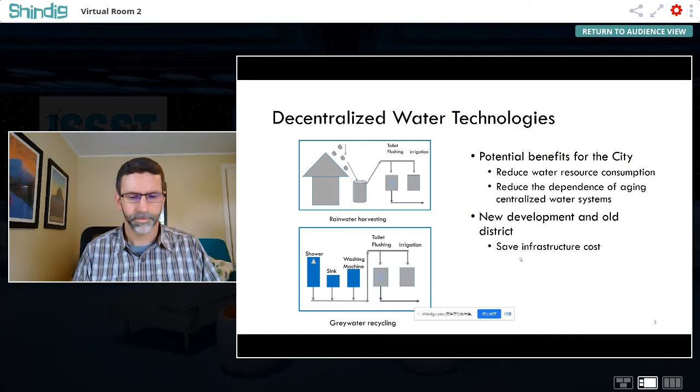It can also save a huge amount of money considering the system upgrades and extensions. But before the utility company can make the investment and the government can better plan for the deployment of such systems, we need to first investigate the people's preferences, in other words, the market potential for such systems.

So here in our research, we built up a bottom-up agent-based model to simulate the spatial adoption and diffusion pattern of decentralized technologies resulting from households' adoption choices. In each round of the simulation, we choose a certain number of households to formulate the samples, and we calculate the agent's adoption utility based on the agent's choice, the agent's preference, and the economic attractiveness and the involvement factors of the environmental benefits.

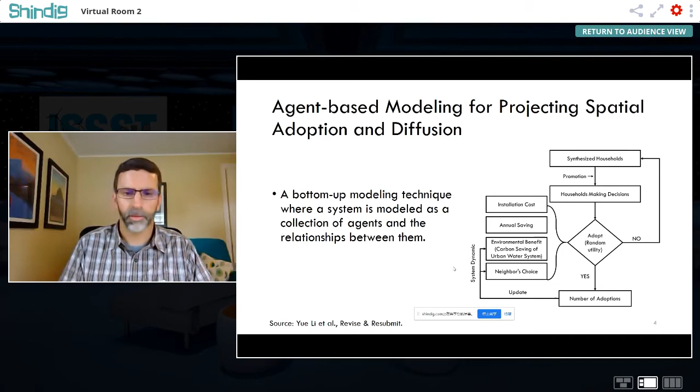Here the neighborhood choices have influences, and we will also calculate the household's decision - in other words, the household's choice decision will depend on the agent's decision with the highest utility value. For those households who didn't adopt any technology, they will return to the agent's pool, and they will still have the chance to join the next rounds of selection and simulation.

In the agent-based model, we first created the synthetic households based on the personal and socio-economic characteristics of the household members. We also collected the property information such as the building height, building size, and the rooftop areas, and randomly allocate the household agents into the corresponding properties to complete the setup of the agents.

And then we use the choice model to calculate the utility of each choice. We use the latent class, like the Latent GOLD choice software, to calibrate our choice model and calculate the conditional probability of class X choosing option M. The software can generate the optimal number of classes and help us to better interpret our results.

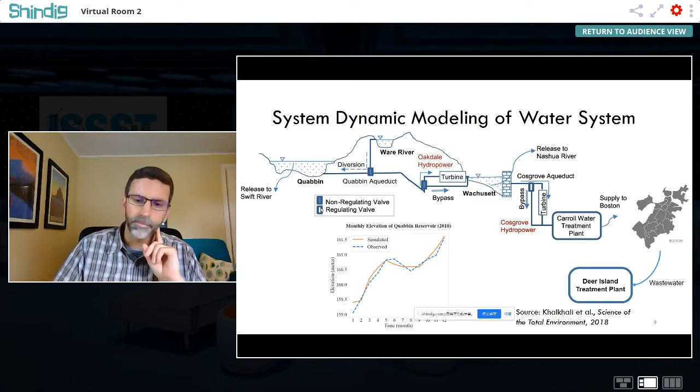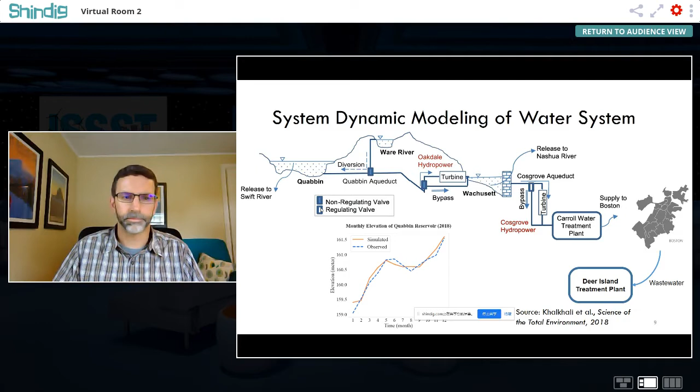We also validated our results by comparing the simulated monthly reservoir elevations with the historical records in the reference year without any adoption of decentralized technologies. Based on both validation results, we can see our simulation results are basically in line with the reported data, and thus can prove the effectiveness of using our model to predict the spatial adoption and diffusion pattern of decentralized water technologies, as well as the impacts of large-scale implementation of decentralized technology on the whole urban water system.

We also visualize the spatial and temporal adoption pattern of rainwater harvesting technology and greywater recycling systems, and we traced their diffusion trajectories. We can see the diffusion converges after 43 rounds of the simulation, and most single-family households prefer to install rainwater harvesting systems. The diffusion of the rainwater harvesting systems will start earlier from the north and central places and will spread later southwards.

To the southward communities, while the GWR, the greywater recycling systems, will diffuse from and mainly concentrate in the north central places and the southwest areas. By visualizing these trajectories, our results can be supportive to recognize the communities with high market potential, and such we can help the government to identify the high potential neighborhoods and accelerate the adoption of sustainable water technologies in a city.

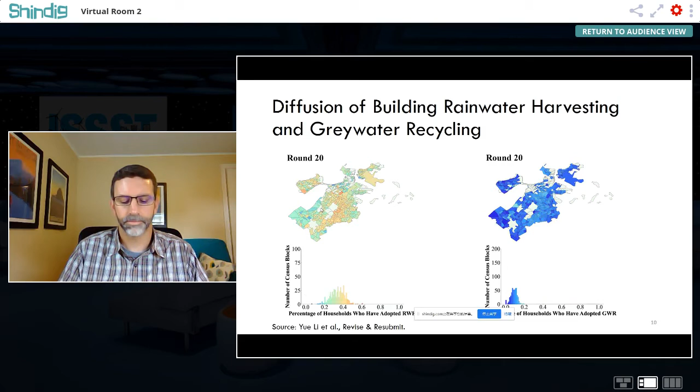Our system dynamic results show that the Quabbin Reservoir has more water during summer and autumn, as a huge amount of fresh water can be saved from landscape irrigation by using rainwater or greywater instead. However, the hydropower generation decreases as less water will be transferred through the hydraulic turbines when potable water supply reduces. Reservoirs will discharge more water to downstream rivers to prevent their water levels from rising beyond the warning levels. It is for safety purposes, but it can also indicate a potential added hydropower potential.

Overall, our system dynamic models suggest the significant trade-offs associated with the large-scale implementation of decentralized technologies, and also quantify the trade-offs between the water saving and the hydropower energy reduction. And furthermore, we didn't find significant carbon reduction because of the high electricity consumption of greywater recycling systems.

So in the future, we are going to explore the optimal deployment strategy for water decentralization to minimize the installation cost and energy used at the same time. By comparing the adoption pattern based on household choices to this optimal deployment solution, we wish to provide insights to the city planners and the government for better designing and planning the innovation in a city.

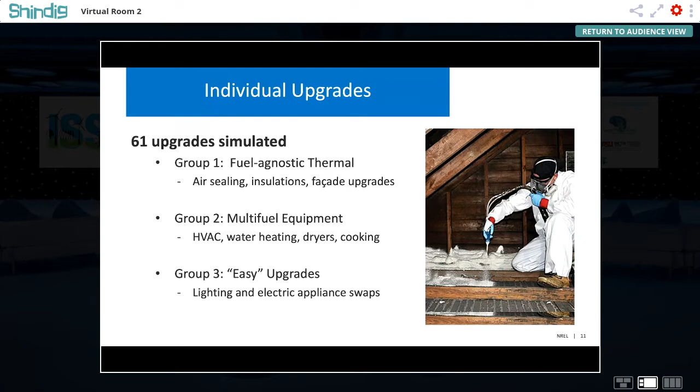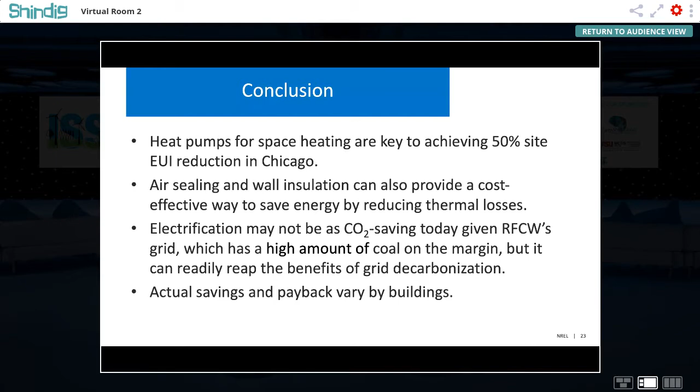Finally, I want to caveat by saying that the actual savings and paybacks vary quite a bit by buildings, even though we did not really show the variability here in this presentation. And there are many interesting questions that remain for further investigation in the near future, including in what situations or building segments will retrofit packages not lead to savings, and what are the thermal resilience and indoor air quality benefits of the retrofit packages.

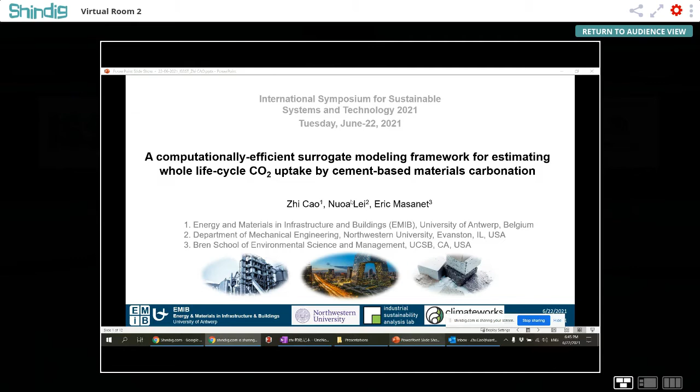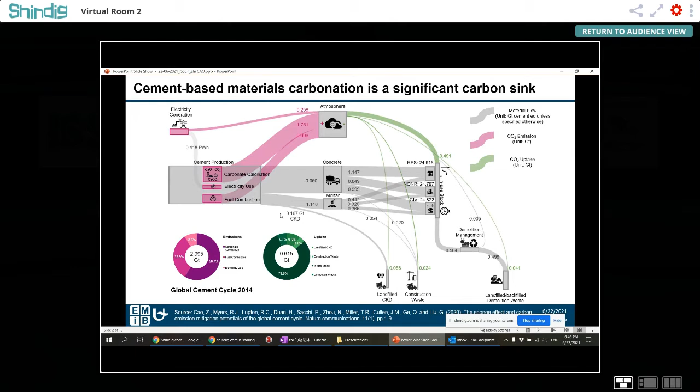So why does cement-based materials carbonation matter? Cement-based materials carbonation is well known as a deterioration mechanism of cement-based materials. But its contribution as an anthropogenic CO2 sink is not equally recognized as compared to its contribution to CO2 emissions. A few studies, including our own study, have pointed out that reabsorption of CO2 by cement-based materials is a significant CO2 sink, offsetting around 20% of CO2 emissions arising from cement production, or 40% of process CO2 emissions if we exclude fuels and electricity used by cement production. Future reabsorption of CO2 will become more significant, driven by growing population and material needs.

To estimate the CO2 reabsorption by cement-based materials, we have to understand the mechanism of carbonation first. As we all know, the main ingredients of ordinary Portland cement include alite, belite, and calcium aluminate, which have significant hydraulicity. After mixing cement with water and aggregates, atmospheric CO2 dissolves in the pore water of concrete and forms carbonic acid. The carbonic acid reacts with hydrated calcium silicates and calcium aluminate. This reaction leads to the formation of calcium carbonate, a process called carbonation.

This process starts at the concrete surface, then slowly penetrates deeper over time. Although it requires a great length of time, cement-based materials carbonation will eventually soak up a substantial amount of CO2. While it could occur in various life cycle stages of cement-based materials, carbonation is most complex in the in-use stage and in the end-of-life stage.

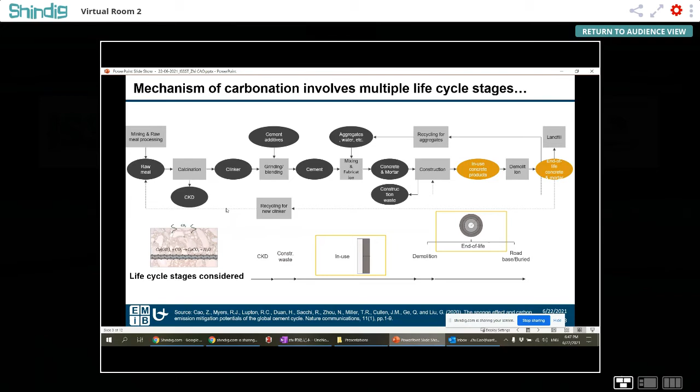At a higher system level, the quantities of cement-based materials that stay in the in-use stage and in the end-of-life stage are determined by their service life, which can be characterized by a survival function and a density function. To illustrate the mechanism, we regard the quantity of concrete consumed in the first year as time cohort 1. The portion of time cohort 1 that stays in use will diminish over time, while the portion that enters the end-of-life stage will climb up over time.

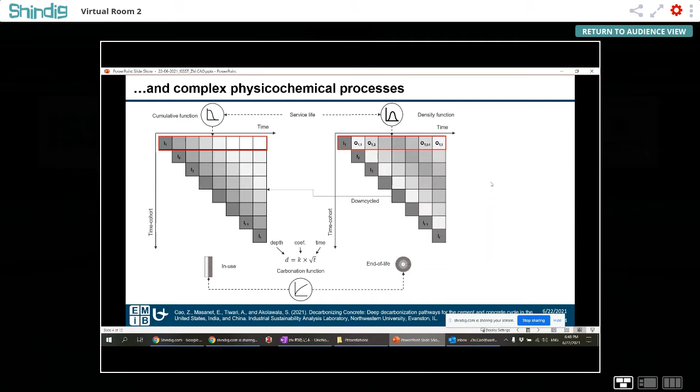We use a carbonation function to describe the carbonation process in the in-use stage and in the end-of-life stage, except that the former is characterized as a slab, and the latter as a sphere. The carbonation process is described as a function of the square root of time, and the coefficient K is subject to a wide range of parameters, including concrete additives, coating and cover, CO2 concentration, exposure conditions, calcium oxide content, share of calcium oxide fully carbonated, particle size of end-of-life cement-based materials, recycling rate, etc.

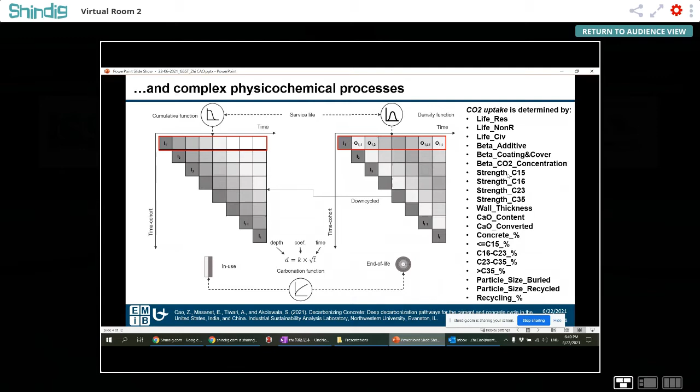Initially, we used a physics-based model to parameterize these complex processes. With this physics-based model, simulating cement-based materials carbonation is actually computationally expensive. Taking the United States cement and concrete cycle as an example, with a physics-based model, it takes 80 seconds to run a single simulation. If we were to run the simulations 1,000 times, which is a reasonable but already small number for uncertainty quantification, we would have to wait for almost 24 hours, which is essentially an entire day.

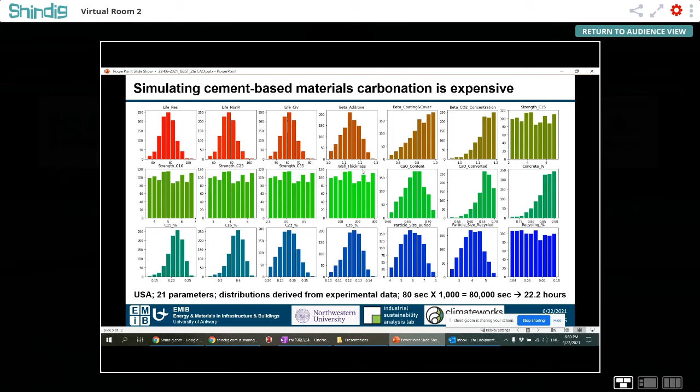We could, of course, disregard the slowness and invest our computational budget directly in the simulations. However, this slowness is unlikely to be satisfying for later optimizations when costs and emerging technologies that have impact on CO2 uptake are considered. You may want to start your simulations with different starting points and different constraints. Also, when it comes to optimizations, even if you have obtained satisfactory results, you may still want to further investigate to see if a better trade-off can be struck between competing objectives.

So the basic idea of surrogate modeling is to avoid investing your computational budget in answering the questions at hand. Instead, the surrogate model helps develop fast approximations to complex physics-based models. Having these approximations will allow us to implement fast uncertainty and sensitivity analysis, explore trade-offs in optimizations, and therefore gain more insights.

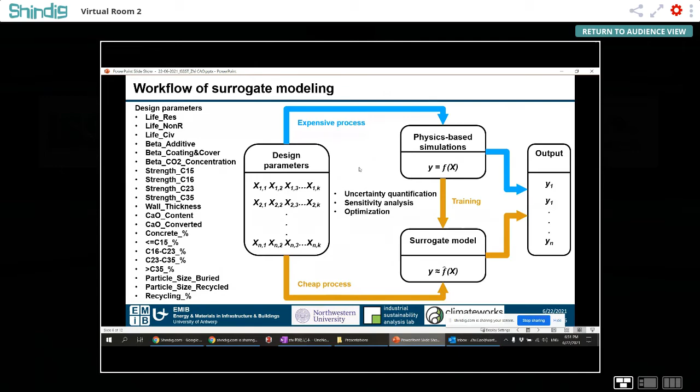While the basic idea of surrogate modeling sounds simple, the devil is in the details. The most urgent question for us now is what surrogate model is most suitable for approximating the physics-based models. We started with Gaussian process, which is the most widely used surrogate model because of its interpretability. However, a Gaussian process model loses efficiency when the number of features exceeds a few dozen, and using Gaussian process makes hyperparameter tuning super challenging, which is an essential step for training the chosen surrogate model.

So we turn to decision tree regression, which is more efficient and also intuitive for decision makers compared to other regression models. We also employed gradient boosting to improve the predictive accuracy of our surrogate model, and the computational efficiency of gradient boosting decision tree regression also allows us to implement hyperparameter tuning more easily.

The traditional ways of performing hyperparameter tuning or hyperparameter optimization have been grid search or random search. Grid search is simply doing an exhaustive search through a specific subset of the hyperparameter space, and random search replaces the exhaustive enumeration by selecting hyperparameters randomly. Here, instead of using these expensive hyperparameter tuning strategies, we employed a Bayesian optimization strategy, which can iteratively evaluate a promising hyperparameter configuration based on the current model and update the model continuously.

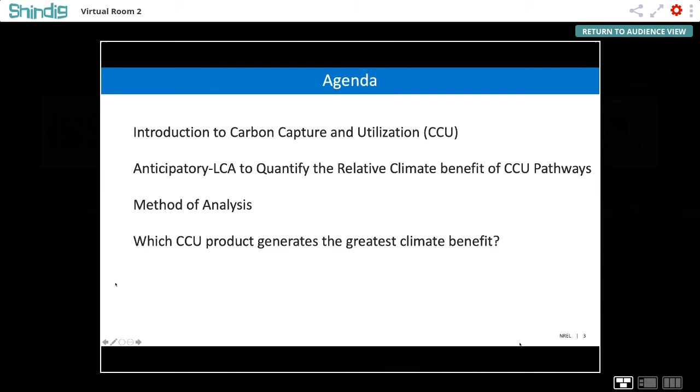So with that, a brief agenda introduction: What exactly is carbon capture and utilization? How can we apply this method of LCA called anticipatory LCA to quantify the relative climate benefits of CCU pathways, methods of analysis, and which CCU product generates the greatest climate benefit? By CCU, I mean carbon capture and utilization.

So a brief introduction to carbon capture and utilization. What exactly is carbon capture and utilization? In its simplest form, it can be referred to as a specific circular economy strategy for CO2 waste emissions. What happens in CCU is that we have emissions from multiple industrial processes occurring globally. You capture the CO2 and make use of it as a feedstock to produce valuable products: concrete, chemicals, aggregates. So basically you're closing the loop, preventing atmospheric CO2 emissions, and also you have an economic incentive because these products you're generating are commercially valuable.

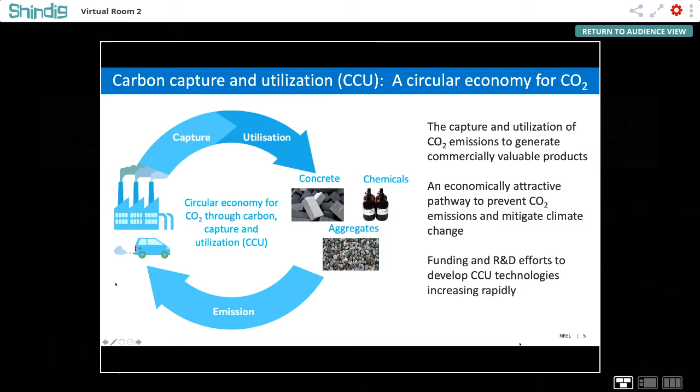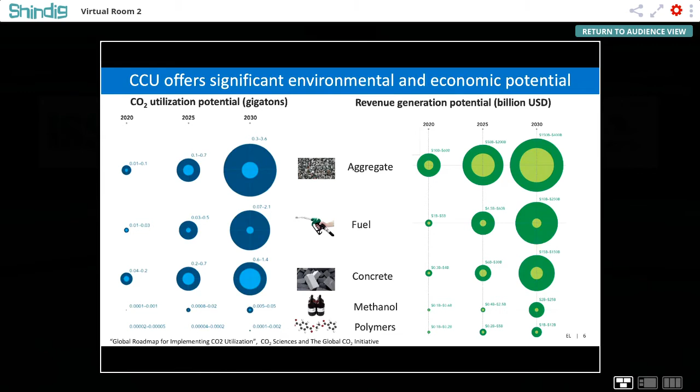Because of the technology development, you can make use of CO2 to produce concrete, chemicals, or minerals. However, there are some key limitations in the existing LCAs of CCU technologies.

Beyond quantifying the climate benefit based on CO2 utilization, there is a lack of a robust method to compare the different pathways. So where exactly can we use CO2 to produce maximum benefits? Is it concrete, chemicals, or minerals?

Obviously, we have the issue of data uncertainty because a lot of these technologies are in the early stages of R&D. So we know that there's going to be an issue with data uncertainty.

How do we guide technology developers in identifying promising research and development strategies to maximize the climate benefits from CCU technologies? How do we account for system aspects? Because we're going to use renewable electricity, is there a better way of utilizing the renewable electricity?

Can we supply the renewable electricity directly to the grid to offset CO2 emissions on the grid, especially when the grid is dirty, instead of making use of renewable electricity in CCU applications? So that's another system aspect that needs to be rigorously and robustly evaluated.

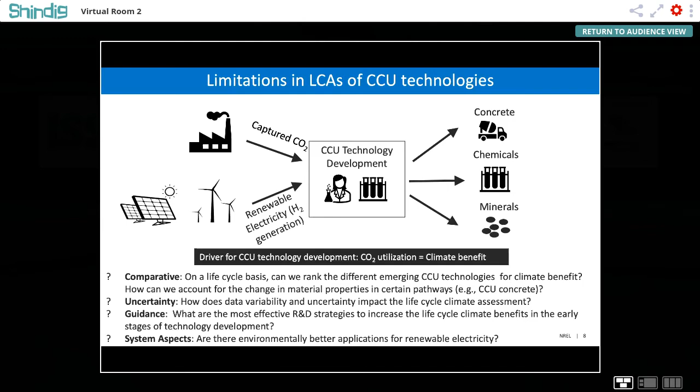Also, there's another challenge from a purely life cycle perspective. When we make use of carbon dioxide to produce products, sometimes the material properties of products changes. For example, when you make use of CO2 to cure concrete, while the mass of concrete is identical, the compressive strength, the durability of concrete can change. So from a functional unit point of view in an LCA, that introduces challenges.

So in order to address these challenges, I've applied this anticipatory LCA method of evaluating CCU technologies. I'm going to start from the left.

I'm going to account for the potential better uses of renewable electricity, for example supplying into the grid. I call this the environmental opportunity cost.

I'm going to evaluate emerging technologies and incorporate uncertainty assessment. At the same time, also identify ways in which we can guide technology developers in the early stages of technology development. The entire analysis is going to be done on a comparative basis, not an absolute basis.

So I'm going to evaluate the climate benefits from utilizing 1 kg of CO2 across different pathways. And I'm going to account for other aspects like what I just mentioned, including changes in material properties because of CO2 utilization when comparing the different technologies to utilize CO2. So this is my approach at a high level.

So I'm going to get down into the details a little bit, but just a little bit. I'm going to compare CCU pathways. The basic assumption here is that when I'm going to produce a CCU product, for example CCU methanol, I'm going to offset the conventional pathway of producing methanol.

So that's the basic underlying assumption. This is the system boundary for the CCU technology. I'm going to capture CO2 from a natural gas power plant, and I'm going to utilize it across producing concrete, chemicals, and minerals.

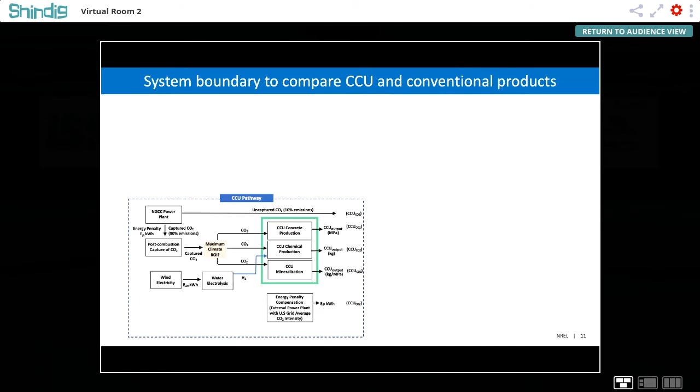So I'm going to compare this with the conventional pathway, because if you're going to produce a product through a commercial product and through the CCU pathway, we're going to offset a conventional production. In the conventional production, because there's no carbon capture, the emissions from the power plant is going to occur directly into the atmosphere. The wind electricity is going to be supplied to the grid instead of being used in CCU.

That's the opportunity cost. And we have the conventional way of producing the material or the chemical or the product. So that's what is going to be offset if you're going to use the CCU pathway. The conventional pathway is going to be offset.

So in terms of the details, I've collected inventory data from 99 data sets through an exhaustive literature review, 69 data sets for chemicals and 26 data sets for minerals. And I've used SimaPro and EcoInvent to determine the life cycle CO2 impacts, both in the CCU pathway and in the conventional pathway.

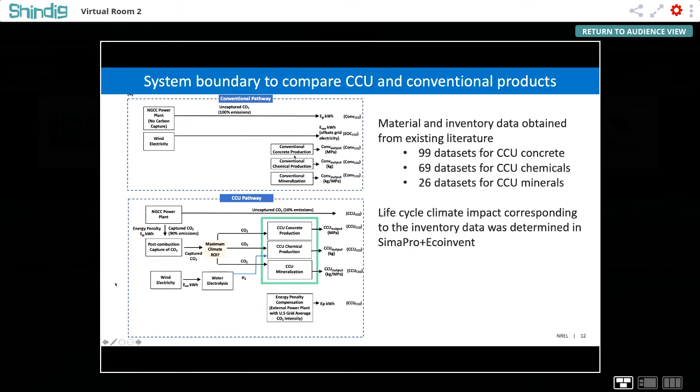So in terms of the products or the pathways, I'm going to evaluate 20 different products: 4 concrete, 13 chemicals, and 3 mineral pathways. So I'm going to evaluate the relative climate benefit across these 20 products.

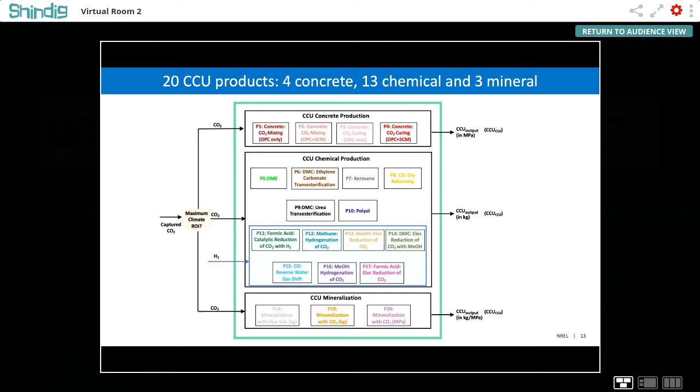So I was referring to the climate ROI metric. So what exactly is the climate ROI metric? The climate ROI metric, without getting into the details too much, is a simple unitless metric. It's a ratio. The numerator of the ratio determines the amount of CO2 that's avoided per functional unit of the product. The functional unit can be compressive strength for concrete, the mass for chemicals, or the mass for minerals. So I'm looking at different functional units. So this is one key advantage: it helps harmonize across different functional units when I'm comparing the 20 CCU pathways.

And in the denominator, I'm going to look at the CO2 utilized per functional unit of the CCU product. So basically, this gives me the amount of CO2 that is avoided from a broad life cycle perspective per unit kg of CO2 that is utilized in producing a specific product. So the implication of this is that the greater the value of climate ROI, the greater is the climate benefit that is generated, especially if it's greater than 0.

If the climate ROI is less than 0, that means despite utilizing CO2, from a life cycle perspective you're increasing climate burdens. So this is the key aspect that you need to consider. If it's greater than 0, it's good for the climate. If the climate ROI is less than 0, it is bad for the climate. So this is what I'm going to refer to in the future slides, so I'll not get into the details.

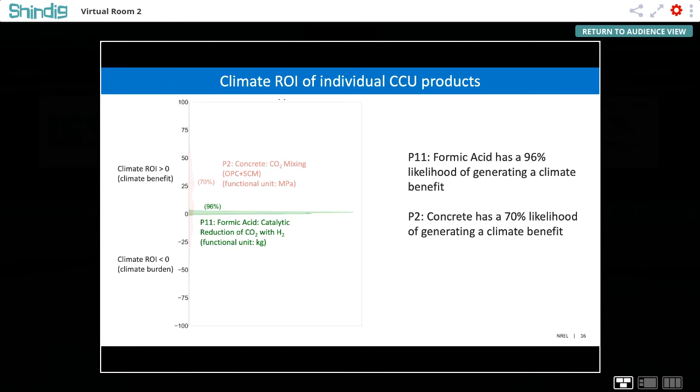The second key finding is that it's better off to supply renewable electricity to the grid, especially when the grid is dirty and very carbon intensive, rather than use it for production of hydrogen in order to produce CCU chemicals. So you'd rather use that wind electricity directly on the grid than use it to produce CCU chemicals.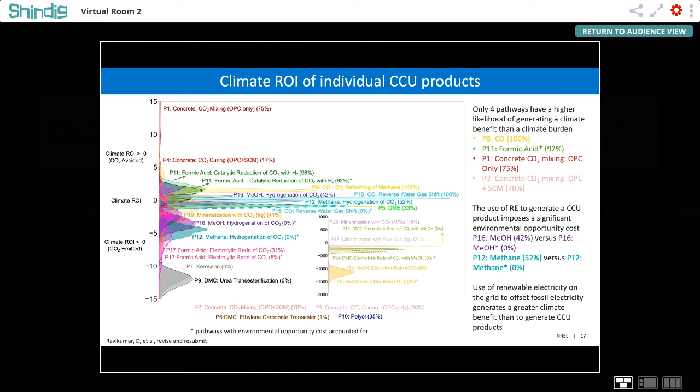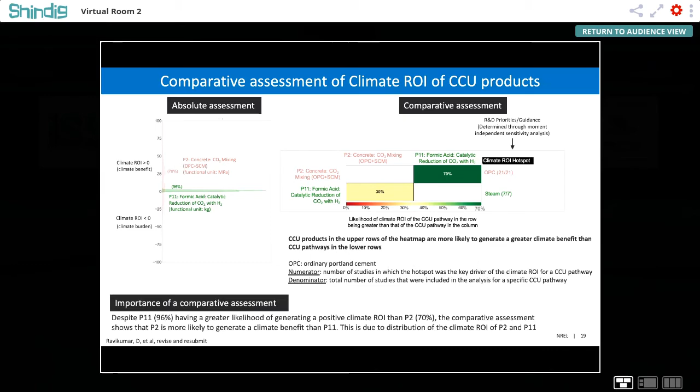So basically, you have to understand that the pathways that occur in the top rows tend to produce a greater climate benefit than the pathways that occur lower in the table. So I'm going to extend this analysis to all the 20 pathways that I've evaluated, this heat map analysis based on a pairwise comparison. So as you can see here, the top rows, as I mentioned, tend to produce the greatest climate benefit. So what's happened in this relative assessment is that the findings still hold.

The 4 pathways which produce the greatest climate benefit per kg of CO2 utilized are the 2 mixing pathways for concrete and carbon monoxide production and formic acid production. You ideally want to avoid these pathways which are at the bottom of the table based on the current state of the art in the early stages of technology development. And in terms of the hotspots, for the chemical pathways, energy use in the form of electricity and steam are the key contributors to the climate ROI metric. So if you can reduce energy consumption when producing chemicals, it'll increase the climate ROI and the climate benefits.

And for concrete, you want to make sure that your compressive strength doesn't decrease when you utilize CO2. And that way we can reduce cement consumption on a per megapascal basis of compressive strength. So you want to make sure that your compressive strength doesn't reduce when you utilize CO2 to produce concrete. So these were some of the key findings from the relative assessment. The 4 pathways produce the greatest climate benefit.

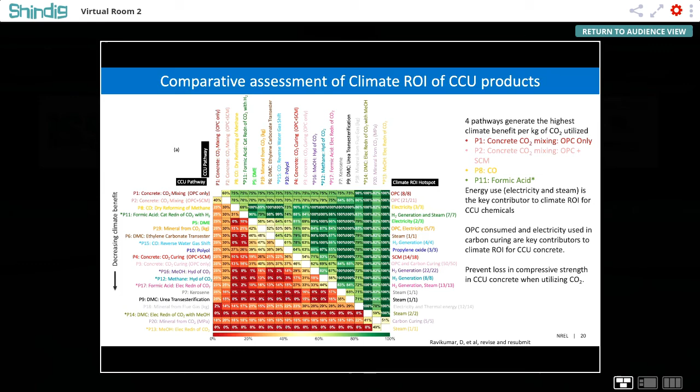So with that, I'd like to close. In summary, I've identified 4 pathways which produce the greatest climate benefit per kg of CO2 utilized. Based on the current state of the art of CCU products, the technology used to produce them, and the state of the grid, it's better off to produce renewable electricity and supply renewable electricity to the grid. And as I've shown you, the application of anticipatory LCA helps address issues of data uncertainty in the early stages of technology development, compare the different CCU products for climate benefits, and also help guide technology development.